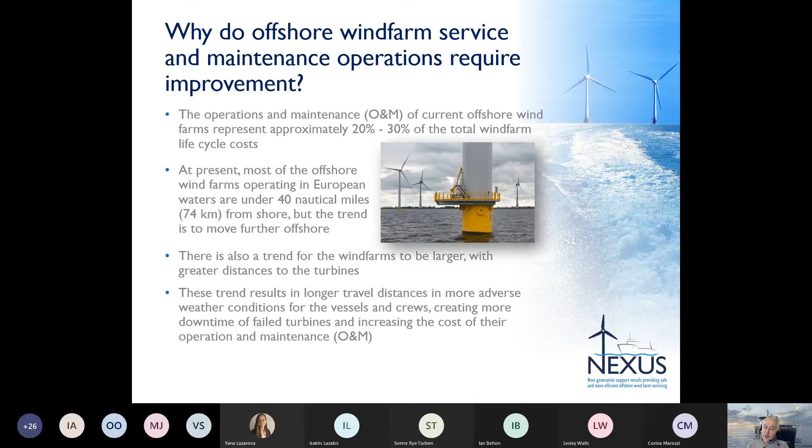There are also major opportunities to improve O&M by being more proactive and looking at data-driven maintenance and operation - planned operations and being less reactive to failures as they occur. A large part of the project has been involved in this.

Looking at what NEXUS has done - NEXUS aims to improve SOV operation efficiency. It's pursuing a new vessel, looking at game-changing technologies, further advances in O&M, and carrying out business analysis and modelling of the complete O&M services.

I'll take a look at the high-level objectives at the beginning of the project. The aim was to reduce logistic costs for offshore wind turbine maintenance by 20% and lower CO2 emissions by 30% using a new design of wind farm service vessel.

To enable robust decision making resulting in reduced costs and effective management of business risks of the service vessel, and to capture robust design requirements for a new design of wind farm and develop a service vessel for operation in the North Sea.

The new vessel concept for servicing offshore wind farms to satisfy and set robust design requirements, and develop specialised safety regulations for wind farm service vessels to improve cost effectiveness and operational flexibility, potentially inhibited by the current generic safety rules.

And then a very important part of the end is to compile a business case and modelling of the whole system for a new wind farm service vessel.

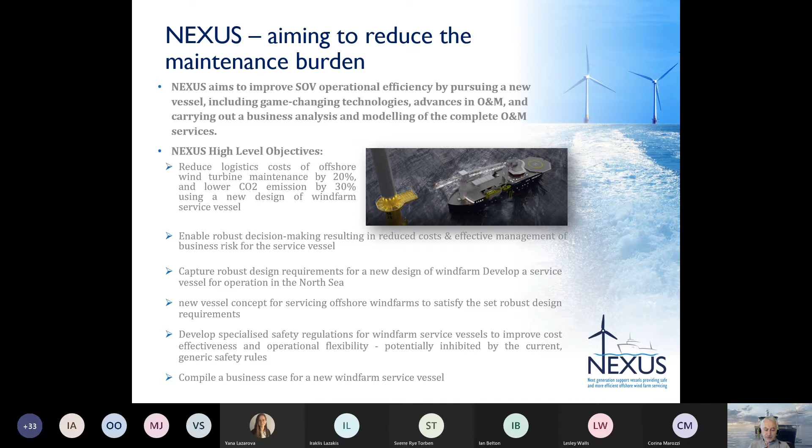So the partnership of NEXUS - we started the project in November 2017, and it's due to finish at the end of this month. The NEXUS consortium has brought together partnership from 4 different countries.

ARTTIC is the coordinator - we're involved in the management, communication and dissemination of the project.

We have Kongsberg Ship Design, and GONDAN, who's a shipbuilder. We've got Global Marine Group providing operational maintenance advice and support, and SINTEF Ocean, who've been providing testing of the vessels and further research. We've got University of Strathclyde, who play a big role in operational requirements, safety management, and the business school modelling for the whole business. And then we've had DNV, the Classification Society, who've been looking at safety regulations and seeing whether they can be modified and improved.

Okay, so a quick run through of the context of the project. What I'm going to do now is pass over to Gerasimos, who's going to take us through, with his team, the requirements of the project.

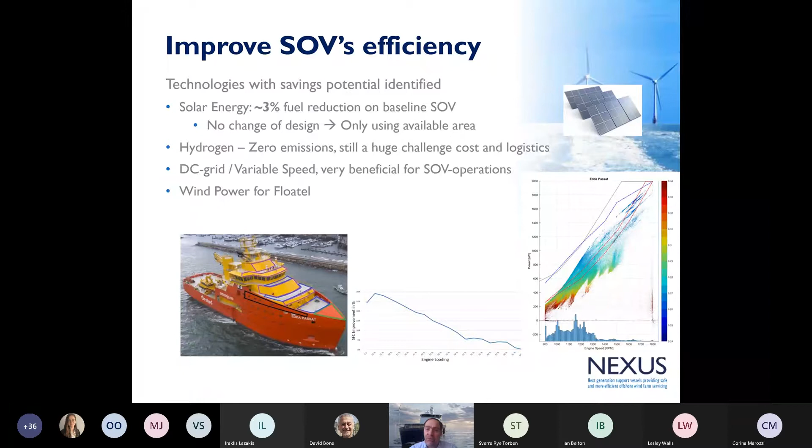Then one of the main activities was to jointly enhance the energy efficiency and operational efficiency. And in this respect, we ended up in a concept that combines predictive power management along with short-term operational planning.

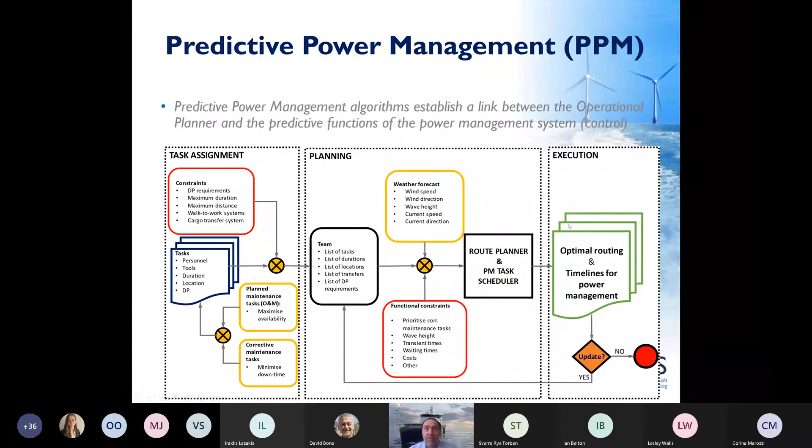The concept starts with task assignment, proceeds with planning of the various tasks, and then also includes the power management and control of load sharing and control of the power plant components. Let me demonstrate the idea a bit better.

In the top layer, we ended up including a mission planner, and a mission planner converts a mission into a list of tasks.

So then, having this list of tasks and going through an optimization mode, we ended up with a timeline. This timeline converts into an operating profile with regards to speed, operational speed, optimal speed versus time, and also the various modes of operation. For example, approach to a wind turbine, leave from a wind turbine, waiting, transit, and so on.

And then this optimal operating profile again feeds information to the predictive power management system, which actually optimizes both operational efficiency and energy efficiency in this way. So one major constraint in that case is the weather conditions, and in this respect we need accurate information for these weather conditions.

In addition, the propulsion modes and the arrival and departure times are considered also as operational constraints.

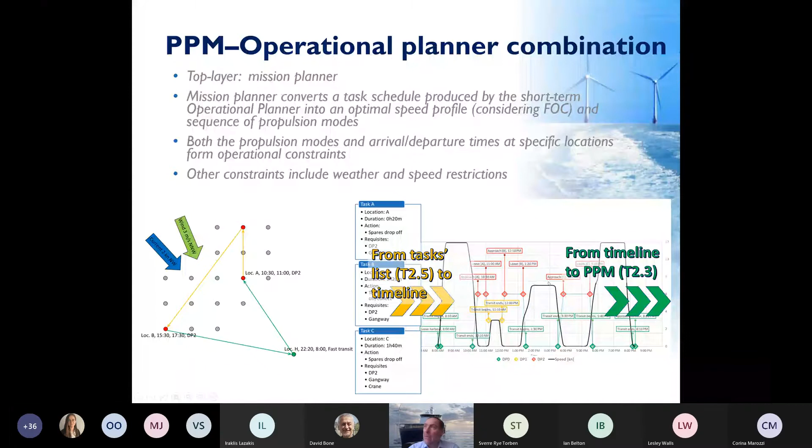Then one part of this tool is the short-term operational planner, and now again Iraklis will lead us through this tool. An optimizer, an optimization tool, was developed in this particular case. So Iraklis, can you please explain the function of the tool?

Yeah, thank you, Gerasimos. So in this respect, this is the development of the short-term operational planner, as part of the NEXUS project.

Going into the particular details of this software, this was developed as a tool in order to have very short, daily, and very quick decision making. So this particular software can be run, depending on the particular input, even on the day, early morning of the day that the actual operations will take place.

The main purpose of this tool is to optimally plan the maintenance operations using a vessel like an OSV, a CTV, or a combination of different vessels, to accommodate the daily needs of the offshore wind farm operations and maintenance.

As input in this tool, you can use the weather conditions, the particular weather conditions within the location of the wind farm, the particular wind farm attributes in terms of the specific location of wind turbines, the wind turbine failure attributes as well, the vessel characteristics, and also, as a final input, the particular fuel that will be used to run the vessels.

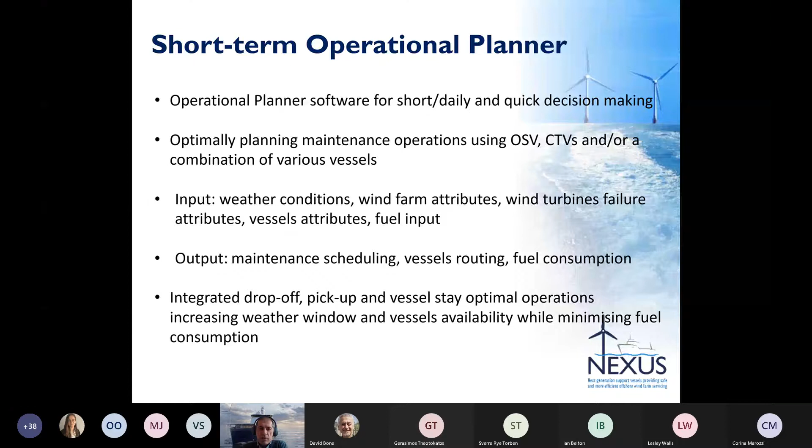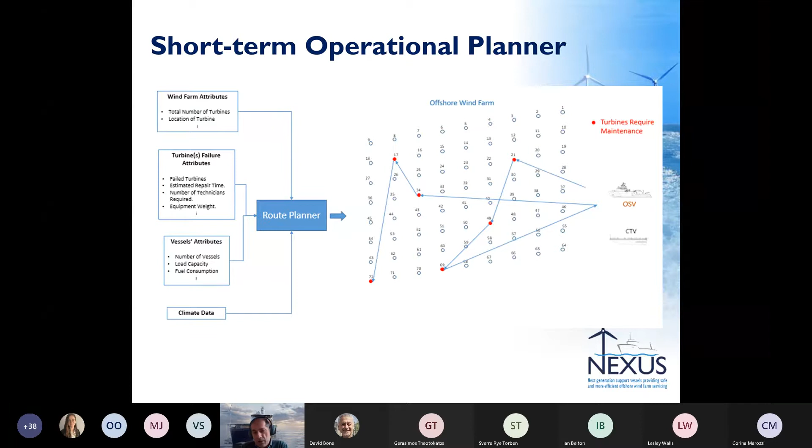So in this case, that's an example of how this particular tool will work, having a number of different inputs on the left-hand side, and how this can then be used to provide the optimal routing within the wind farm.

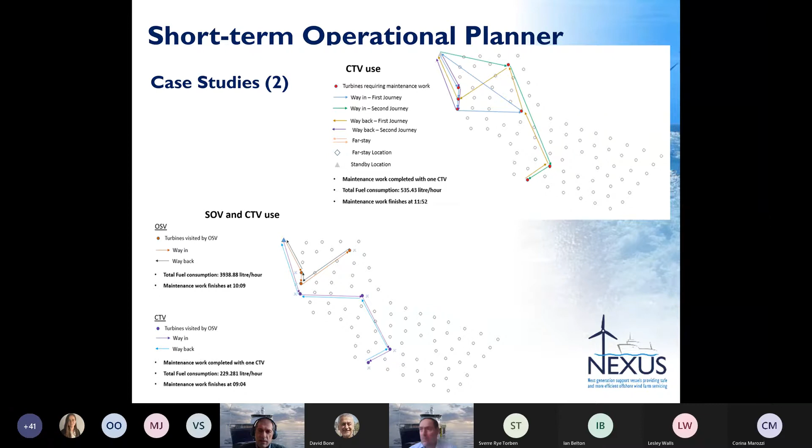So the last part of this presentation covers the safety enhancement of the SOVs and their operations. That was a part of the work performed with the Maritime Safety Research Center and DNV, and also Kongsberg participated and contributed to the work.

In this respect, we started with a safety analysis of the baseline design along with proposed technologies, and we included in the safety analysis the power management system, including power generation, distribution, control, batteries, and predictive power management, the dynamic positioning system, the motion compensated gangway system for technician transfer, the interface between the SOV and the wind turbine, the interface between the SOV and the daughter crafts with different davit systems. We also investigated the cybersecurity

vulnerabilities, and at the end we used the results in order to enhance the safety management system and also to map regulatory and class rules that need to be amended or added in order to cover all these requirements.

So we'll start with the safety methods we use traditionally. The maritime industry uses traditional methods, for example FMECA, FTA, HAZID, HAZOP, however these methods, although they cover critical failures and can cover reliability problems, they cannot cover all unsafe scenarios.

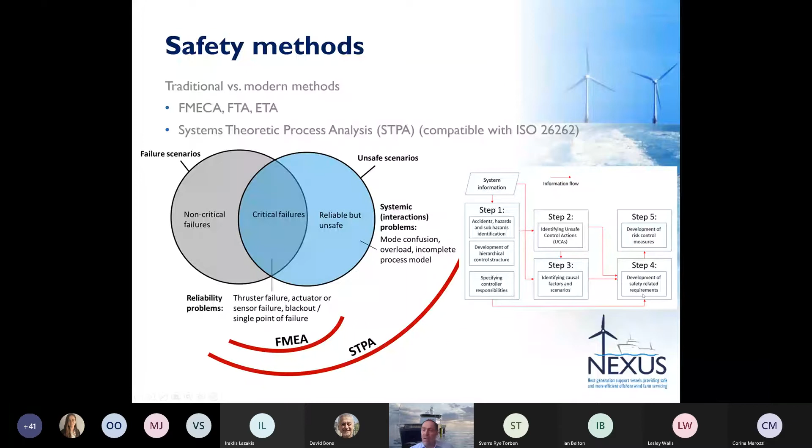So in this respect, in the NEXUS project, we use more modern methods. For example, we use the System Theoretic Process Analysis, STPA, which was developed from MIT and used in a number of systems in aerospace and avionics. In this particular case, we followed the STPA process to identify unsafe control actions which may lead to an accident or a hazardous scenario, the causal factors leading to these unsafe control actions, and then in order to develop safety requirements for all the areas that I mentioned in the previous slide.

Moving on, a causal factor is a factor that basically leads to an unsafe control action, and an unsafe control action can lead to a hazardous state. For example, a causal factor is the gangway operability suddenly reaching the limits, or alarms going off. This leads to an unsafe control action, which is to retract the gangway, and then this may lead to hazardous states, which may occur if the gangway is retracted while technicians are being transferred.

When we map and identify causal factors and unsafe control actions, we can propose prevention measures, both for design and operation, and mitigation measures, which need to be applied after the unsafe control action occurrence. We also consider causal factors from the safety assessment and cybersecurity threats, leading to a holistic mapping of safety requirements during operation and design of this vessel.

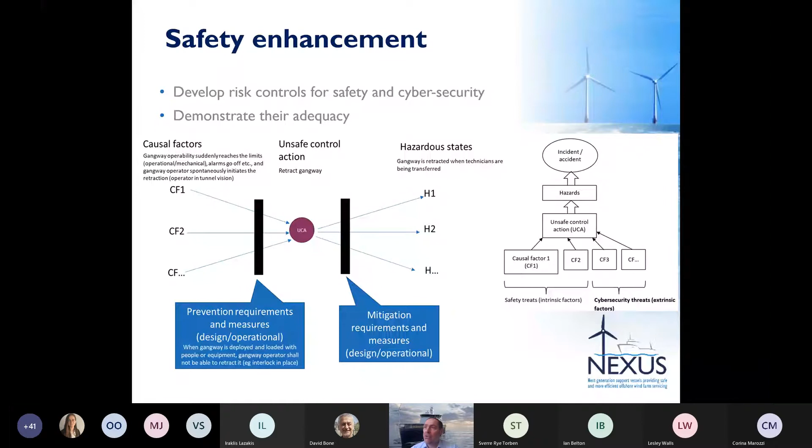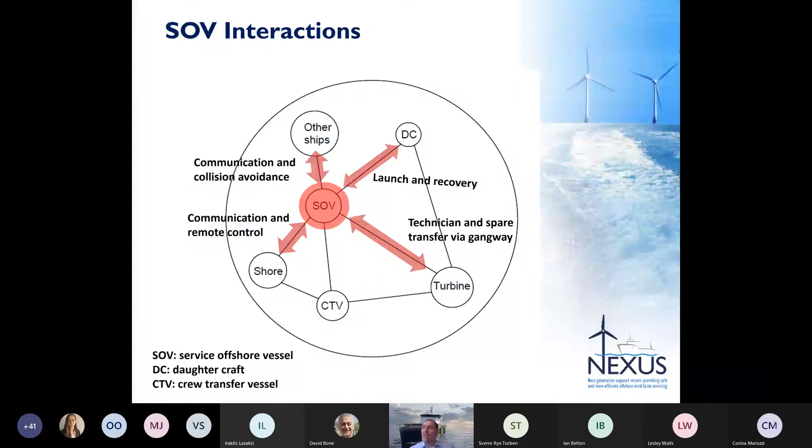We included the interactions of the SOV with all the actors, for example with the shore, the crew transfer vessel, other ships, the daughter craft, and the wind turbine, as well as individual interactions between the SOV and each of these actors. We also considered a number of operating modes, such as rest, transit, maneuvering control of the SOV, interface control during deployment or use of the gangway, and interface control during deployment or launch of the daughter craft or crew transfer vessel.

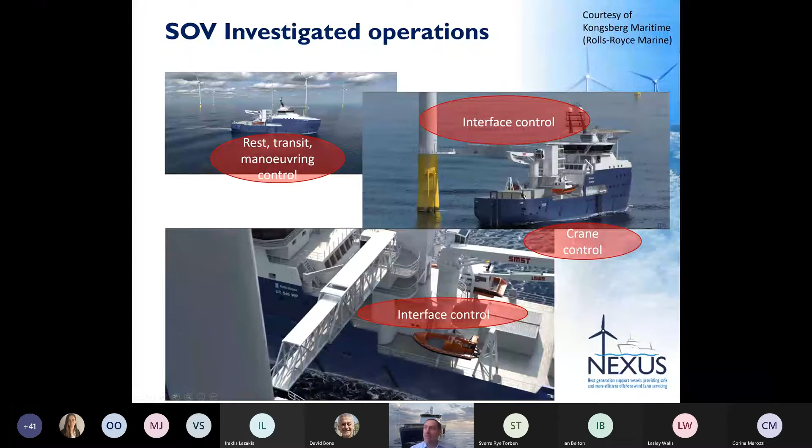This ended up producing a very large envelope, so we needed a more automated way to carry out safety assessments.

In this respect, we developed a semi-automated tool using the STPA method. After the user includes the unsafe control action, there is an automated way of producing the causal factors from specific lists that we developed in this application.

This leads to a number of functional requirements, related either to design or to operation. We then ended up proposing preventive or mitigating measures, and ranking their impact in terms of severity and cost effectiveness in order to prioritize the proposed measures.

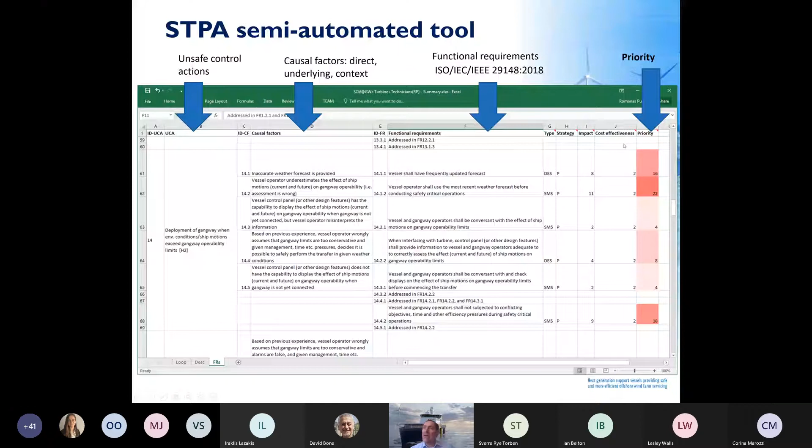This led to a very large number of requirements. For example, for the SOV bridge and dynamic position operation, we identified 145 requirements. For the davit operation, 38 requirements. For the gangway operation and technician transfer, 88 requirements. For the daughter craft operation, 27 requirements, and for technician transfer to daughter craft, 16 requirements. That was the final state of this analysis to map the requirements.

Work was also carried out by DNV. They considered the requirements and the design rules, and mapped which requirements are covered by existing rules and class regulations, for example the class rules of DNV and the regulations from SOLAS, and which requirements are not covered. In that case, recommendations for amendments to the rules were proposed.

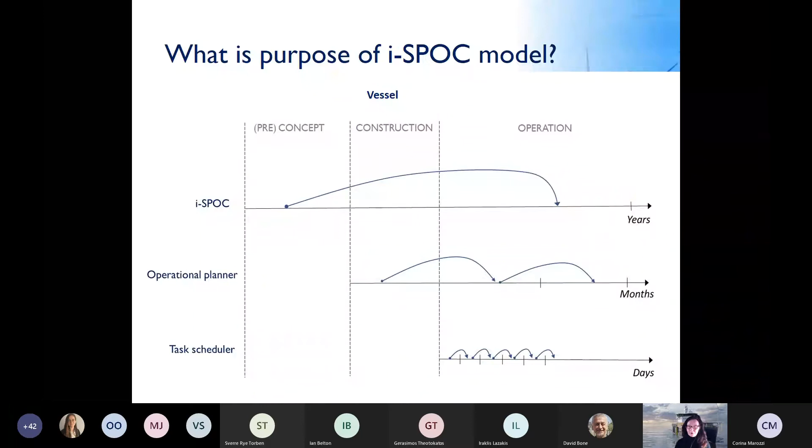But as you can imagine, the data demands we need to feed these models is also quite different, because we don't have the granular data that you might have when you're actually in an operational context.

So from the i-SPOC point of view, what we're really doing is focusing on supporting decisions about design choices of logistic concepts by forecasting what their future operational capability will be. So from the vessel designer's perspective, we're thinking about how we make choices internally to the company that will cause positive impact on the external business market for offshore wind in future. However, from a business perspective, we don't know what the future will be.

And as we know, there are always shocks to the business environment. So one of the things we wanted to build into our modelling framework was an understanding, or a visioning, about what these future business environments might be. If we could do that, it provides us with a mechanism for thinking about what might happen externally in future, to help us think about, at the very least, the robustness of the choices we make now about the vessel solution.

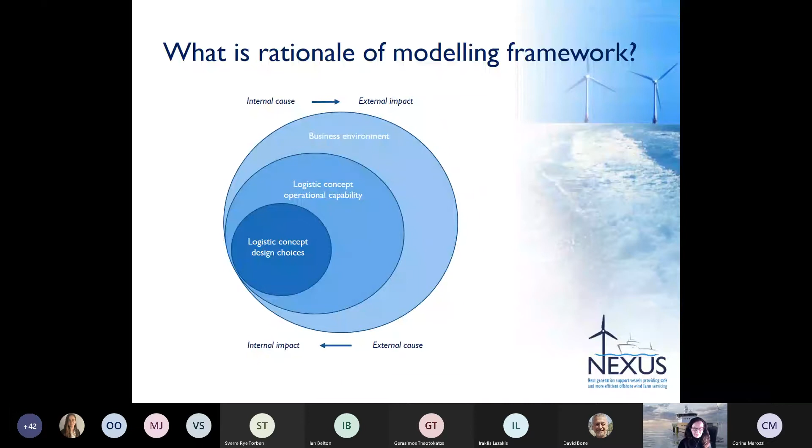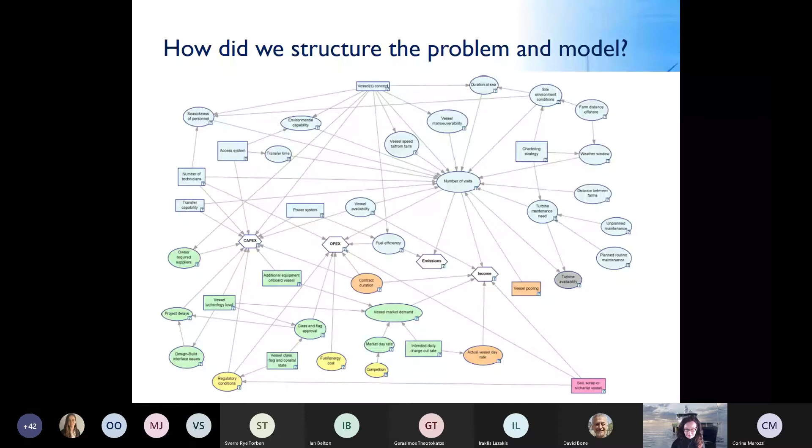So when we build the model, we actually use a mathematical model. We've chosen to build this i-SPOC model as an analytical model, drawing on established probability theory, in particular queuing theory.

Now, why did we choose to build it as an analytical model rather than as a big simulation tool? There were a number of reasons. One is that it allows us to express the relationship between all these uncertainties and choices and our KPIs very explicitly, and to understand the nonlinear relationships that might happen in the system between all these variables. Also, by building it as an analytical model grounded in established probability theory, it allows us to have a coherent means of understanding the integrity of the way we represent uncertainty in the model.

The other reason for us is it also allowed us to have a good first order approximation to this NEXUS world, which allowed us to span some of the key engineering decisions with some of the business consequences, without getting too detailed in either the business or the engineering, but to try and balance the two.

Now, I'm not going to show you the maths of it. In a little while, Ewan will share some of the outputs, but let me just try and summarize some of the key features of it.

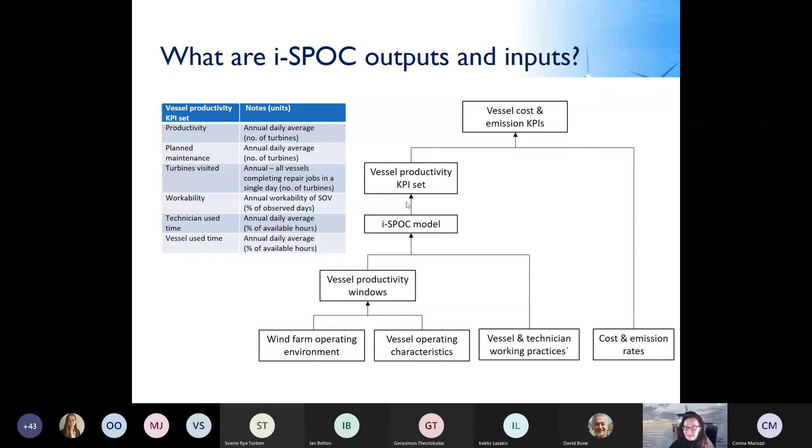So at this point, what I will do when talking about the vessels is pass over to Vidar, and he will describe these vessels and their operating characteristics. Ewan will come back later to describe some of the analysis.

Perfect, then I will open my screen. I believe you see it. I will run through how we have done the ideation and down-selection of logistics concepts to be run through the i-SPOC modeling.

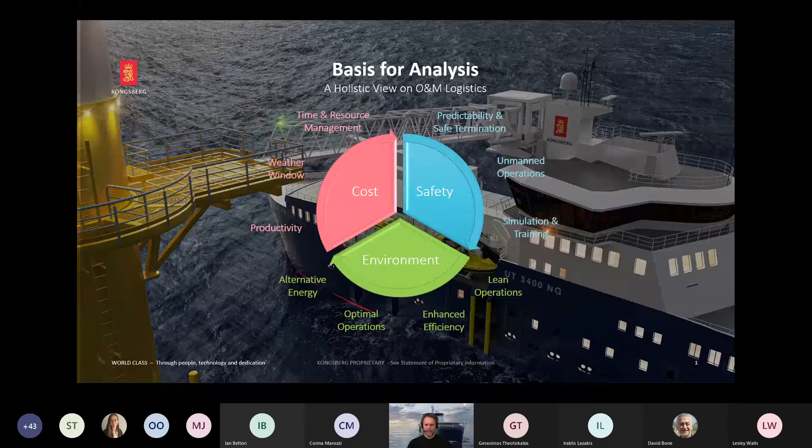What is a bit unique to the holistic view is that we do not only model the performance of the vessel, we also put it into the context of the overall operation and look at associated costs.

These associated costs are also factored into the modeling that we are doing, which means that the optimal overall concept might not necessarily be the cheapest vessel, but the one that we can justify performs best, including these associated costs.

Starting at establishing logistics concepts, we're breaking down the duty into its elements. O&M can in principle be done by offshore operations, meaning technicians being housed offshore, or shore-based operations shuttling to and from shore. The latter is not a core part of the NEXUS scope, so our focus has been on the offshore solutions.

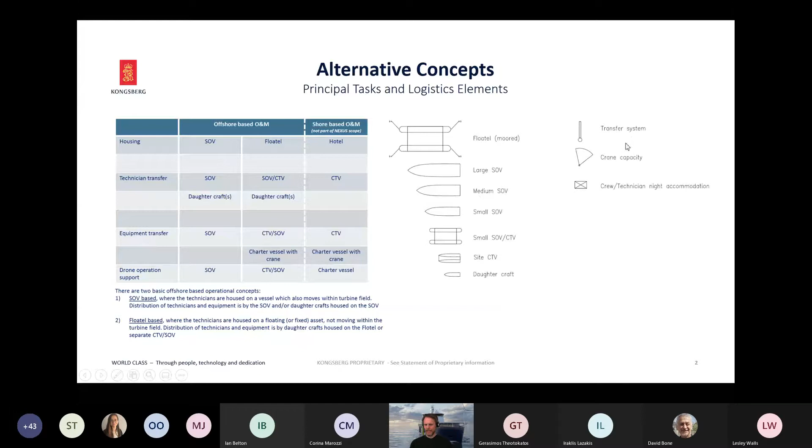In the future, we also believe drone operation support will increasingly be a relevant duty of these logistics setups. Looking at these fundamental tasks, we populated our toolbox of flotel, various sizes of SOVs, CTVs, and daughtercraft, and also transfer systems, crane capacity, and fundamental accommodation function.

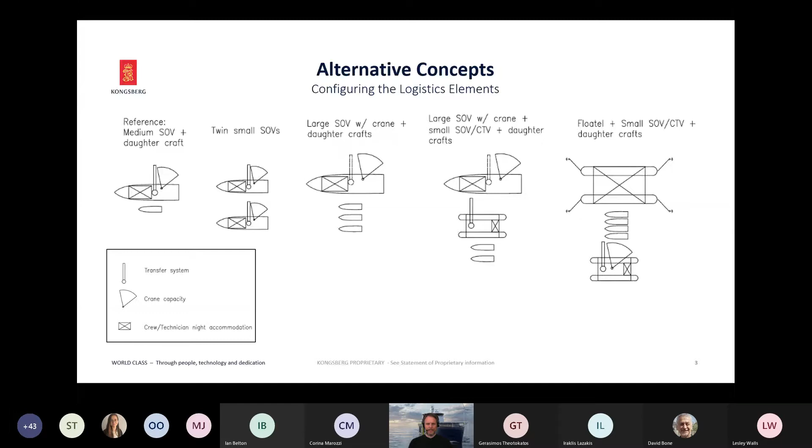We then configure different logistics setups comprising one or more assets, each configured to be capable of delivering what we believe is the needed capacity in the field. In terms of SOV concepts, we also assessed various hull forms, more or less exotic, having different buoyancy distribution, different water plane area and center of flotation, thereby having different capabilities in terms of resistance and motions.

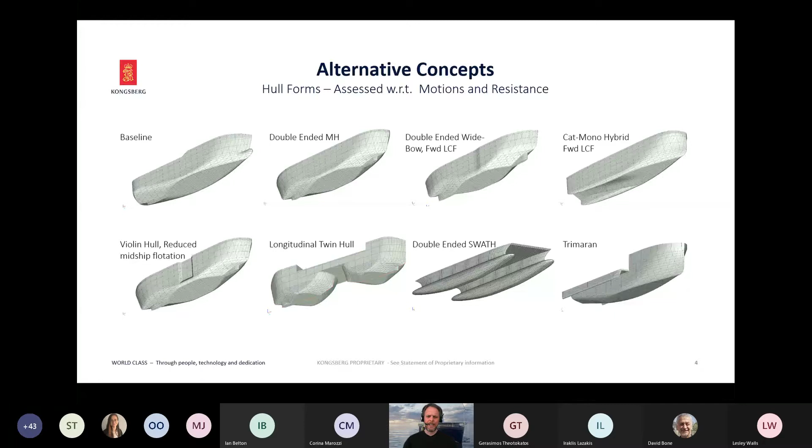This was also considered in the context of us wanting to assess not only the typical midship mounted gangway, but also the prospect of a bow mounted gangway, as we will touch upon later on. We then, for each of the concepts, did a parametric design to scale them, ensuring that each concept has the necessary areas and volumes to deliver the capabilities required.

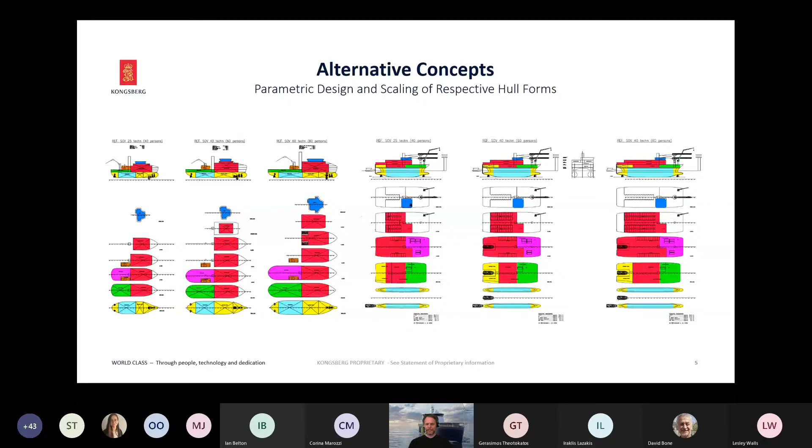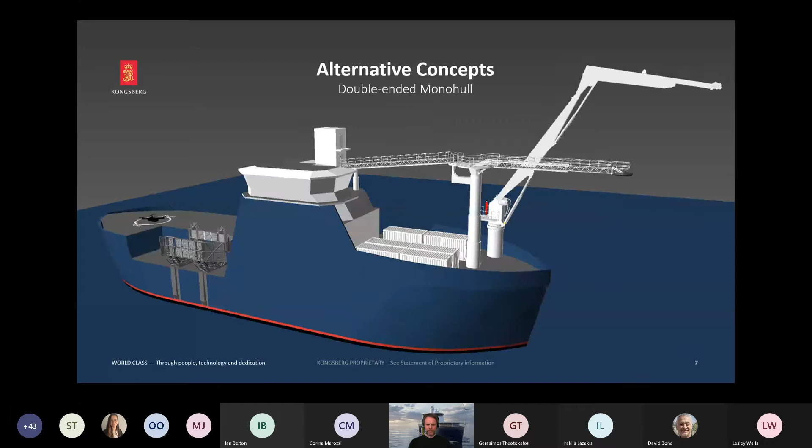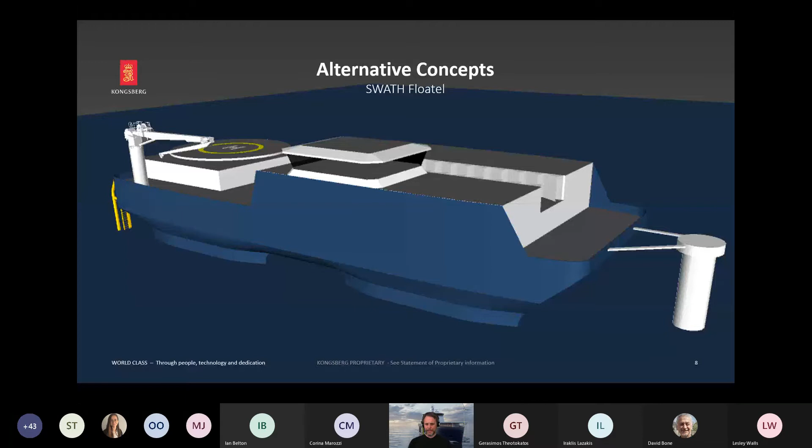And then we had scaled concepts that we could put through analysis. For some of the concepts, we also looked more into practical implications. Here, a case with the bow-mounted gangway with a forward superstructure, the same concept with a central superstructure, obviously affecting how we can arrange the vessel internally. And also here, a SWATH floatel concept fixed to a fixed monopile structure offshore.

Then putting this through analysis with respect to resistance, motions, productivity and energy demands, we were looking at knowledge from past operations of similar vessels. And we see that generally, of course, O&M operations consist typically of cycles of roughly half an hour's duration, where you transfer between turbines, connect to a turbine, transfer technicians and equipment, and then move on to the next. This is pretty much similar to a ferry operation, more than a typical cargo vessel operation.

What we found in our analysis, broadly speaking, is that the more exotic hull forms generally tended to have more resistance, especially at higher speeds, whereas the differences at more moderate speeds, the type of speeds that you operate with in a wind farm, were minor. In terms of motions, the more exotic hull forms tended to sometimes perform better in certain ocean environments or sea states, but poorer in others. In conclusion, we found that the more exotic hull forms did not provide, let's say, robust benefits overall.

And we gravitated towards a hull form that is for sure novel, but still fundamentally a monohull of a fairly conventional sizing. It's a double-ended monohull. It will typically be equipped with 2 azimuth thrusters forward, 2 azimuth thrusters aft, and the advantages of that configuration is increased maneuverability, allowing for better acceleration, turning and braking power, and also better station keeping efficiency by the fact that you can use the main propulsors in an optimum manner in DP operations. Also, the symmetry and more uniform component choice should allow for simplified engineering.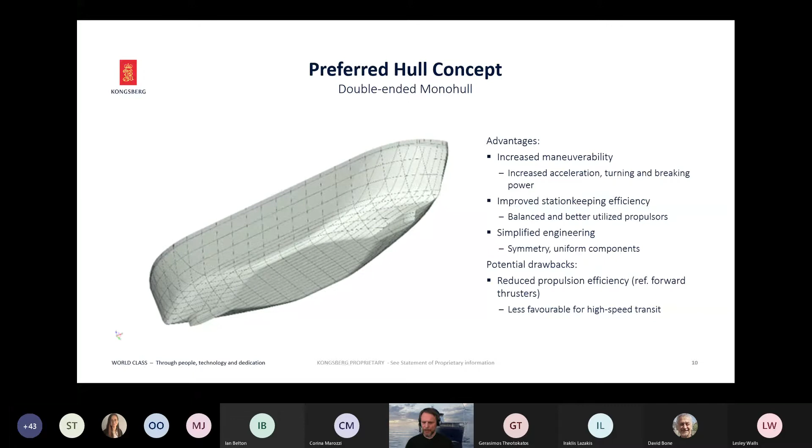In terms of drawbacks, having forward thrusters would be some drawback at higher speeds, but considering an SOV operation, most of the operation is at moderate speeds, where the benefits in terms of maneuverability much outweigh the disadvantages of forward propulsors. So this became our preferred concept hull-wise.

Then looking at means of transfer, we see that typical SOVs do have an extensive use of daughtercraft, here indicated with the red lines over a period of close to half a year. But then the gangways are being used for the blue bars. So daughtercraft provides an important flexibility. At the same time, it introduces a vulnerability, as we see towards the right-hand side here, where there is a period of a few weeks where you cannot operate daughtercraft due to inclement weather conditions.

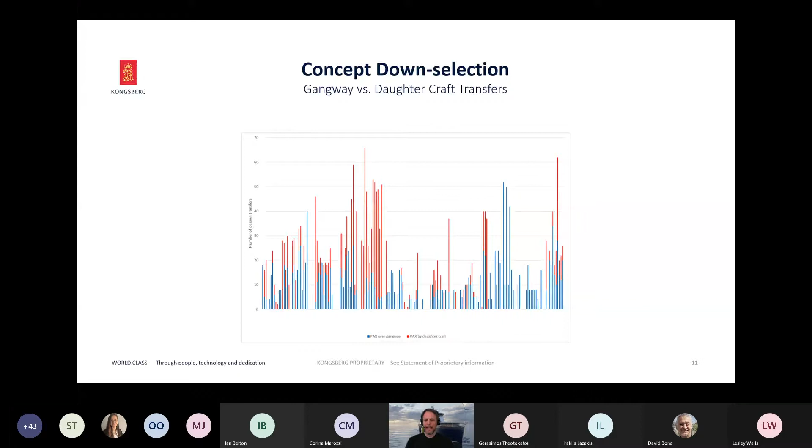So in conclusion, we found that we would probably be bound to have a concept including a gangway apart from daughtercraft. And that led us to suggesting concepts for the iSPOC analysis with direct transfer SOVs with gangways based on the double-ended monohull with the side gangway, the conventional setup, and the more exotic or new novel setup of a bow gangway.

Then for reference, we maintained a SWATH SOV design as well, also in different sizes in terms of technician count. And then we wanted also to compare that with non-direct transfer SOVs based on monohull, SWATH, and floatel designs. So these are the designs moving into the iSPOC analysis, which I believe Ewan will present more of the results of. I pass the floor to Ewan.

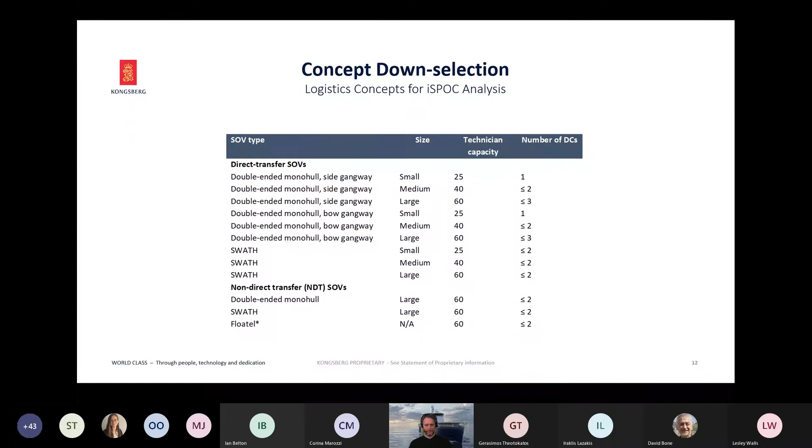Okay, thanks, Vidar. I'll just share my screen. Okay, hopefully you can see my screen okay.

So I'll just show a small selection of analysis using the iSPOC model that Lesley set out earlier to investigate the performance of the logistical concepts that Vidar has been describing. More generally, the analysis was run with data drawn on existing wind farms. So we used Dogger Bank and Race Bank with estimates of demand for different types of maintenance jobs and the durations of these, as well as the vessel operating characteristics, in order to generate the productivity windows that Lesley was discussing earlier for different times of the year.

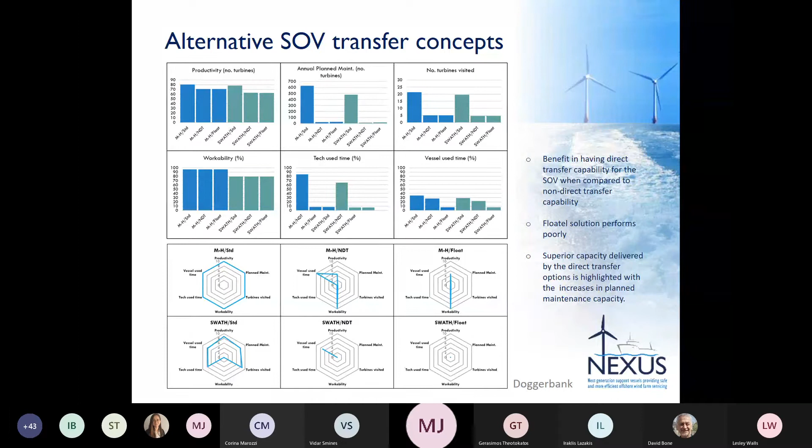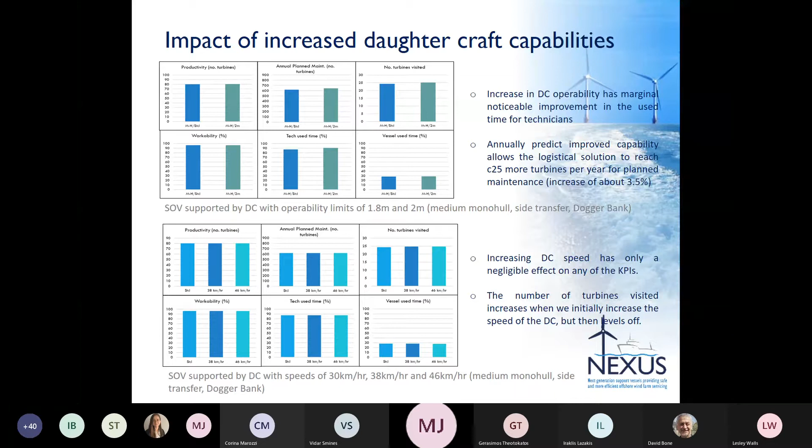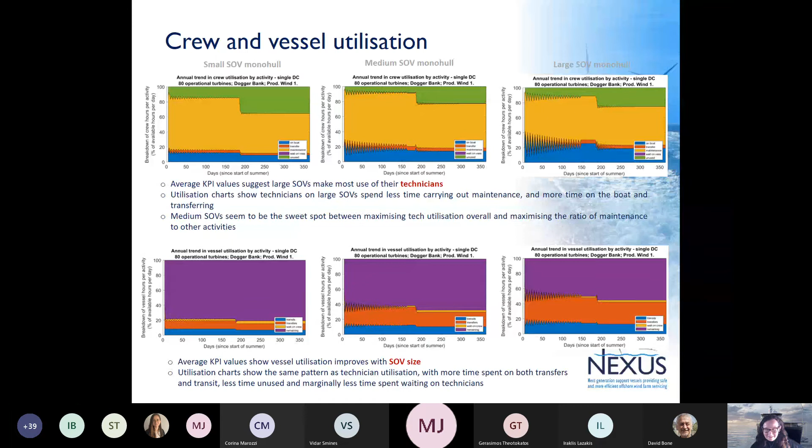So I was just going to summarise, because Ewan's just given you a flavour of some of the analysis we can run, particularly looking at the productivity KPIs in relation to some of the vessel concepts that Vidar has described. And if we go to the next slide, please, Ewan.

I think one of the things I wanted to end on was a little bit of reflection about how we validated the model, because we are trying to forecast well into the future for a vessel that doesn't exist, for farms — although in some test cases we've used farms that do exist — but for a situation where we've not actually applied the vessel. So I wanted to share how we'd approach validation, because we can't necessarily do it in the conventional empirical way.

Part of it goes back to our academic work and the fact that we're working with theoretical models, and we've made choices about algorithms to implement some of that theory into a software tool. So there's been a lot of backroom work in terms of mathematical proof and experimental analysis with those algorithms. But more importantly practically, in this ISPOC model there are about 30 assumptions that we have made and negotiated, sometimes quite vigorously amongst the team.

These assumptions fall into basically three categories. There's a small set that are hardwired into the theoretical underpinnings of the model — once they're signed off, we can't change these. Then there's a set of modeling choices that are adaptable, but require a modeler like Ewan, or someone else from the Strathclyde team, to adjust the model to ensure we maintain the integrity of the underpinning probability framework.

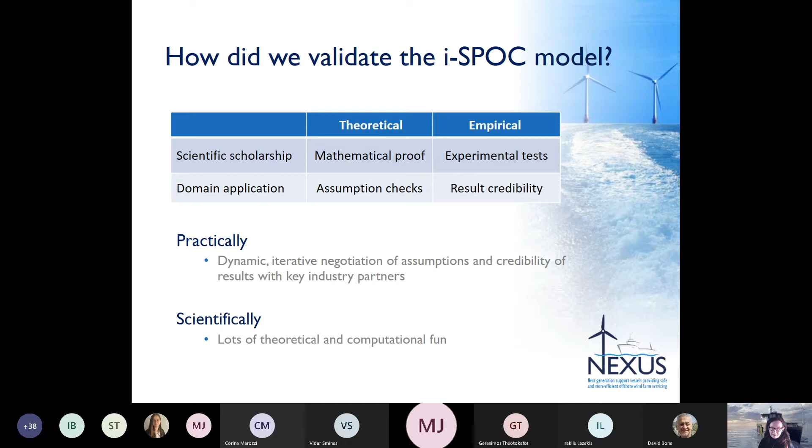So I'm going to finish there for now in terms of this modelling framework. As we've already indicated, later this morning some of our other colleagues from the business school will talk a bit more about how we've used some of this within a wider business analysis, particularly looking towards the future of offshore wind. But at this stage, I'm going to ask Matthew, who's been keeping an eye on questions — I think we still have a few moments for any questions about this section or anything that Iraklis, Marcus and Dave talked about earlier this morning.

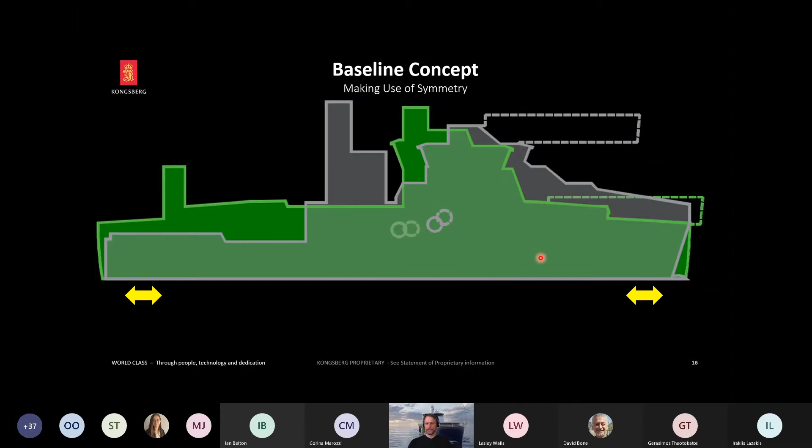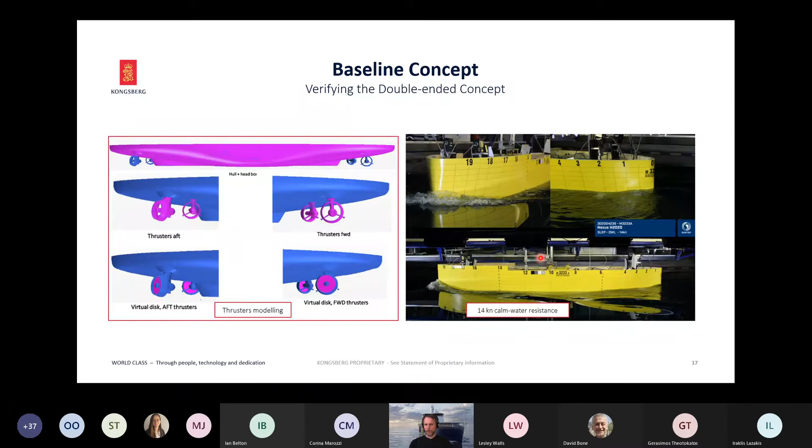The double-ended concept was further explored and verified through numerical simulations and also tank testing, which led to notable improvements in the design and performance.

In terms of the overall layout, we focus on symmetry and try to facilitate scalability and minimize build cost. That means we want to keep some parts of the vessel stable, whereas other parts could be scalable. The starting point is a midship logistics section. It comprises the main elevator case, has a boat landing to starboard, a pallet handling system to port, and the charterer and ship offices in the superstructure. This section basically remains unchanged irrespective of the scale of the vessel.

Then towards each end, we have machinery sections in the bow and the stern. These are also largely remaining the same irrespective of vessel scale. Then importantly, in between - in what is still the parallel midship section to a large extent - we create scalable sections where we can choose the extent of personnel, alter the number of daughter crafts, and also the packing area capabilities.

In the center of the vessel, we also have an independently scalable service section. We see that there are longitudinal arrangements that allow us to alter the central section independently from the side sections. This creates flexibility in how we execute and prioritize the use of volumes, and importantly, we can lengthen or shorten the vessel by prioritizing different capabilities depending on the project.

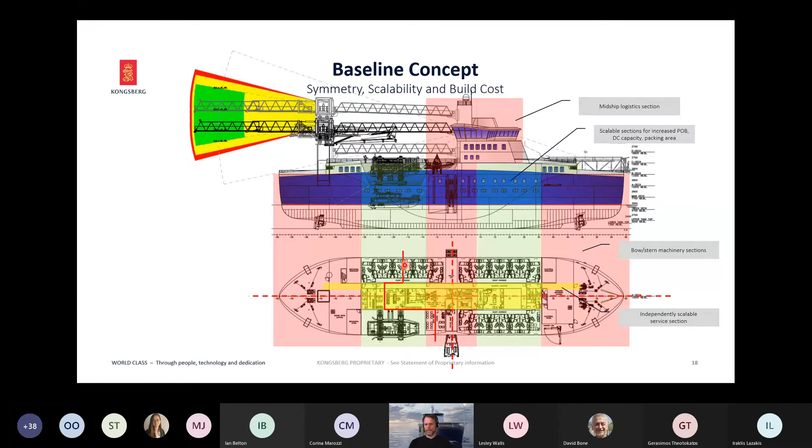A novel feature is that we have restacked the vessel. Notably, the packing area is moved down to the tween deck, which is often a bit underutilized area on these vessels. Typically, the packing areas are on the main deck. This is then extended with the logistics functions up.

We have made available the core and scalable parts of the vessel for the client areas, meaning all accommodation is above the waterline, close to the midship, in the most comfortable areas of the vessel. So this is a very charterer-oriented vessel, focused on comfort, apart from scalability. Then the more peripheral areas of the vessel are used for vessel systems.

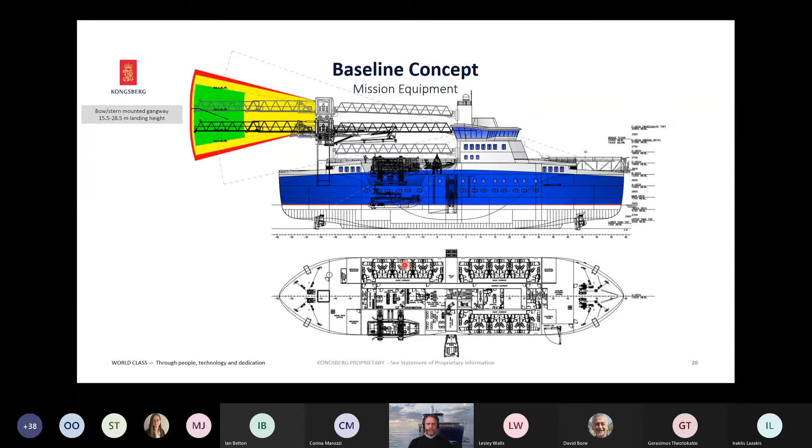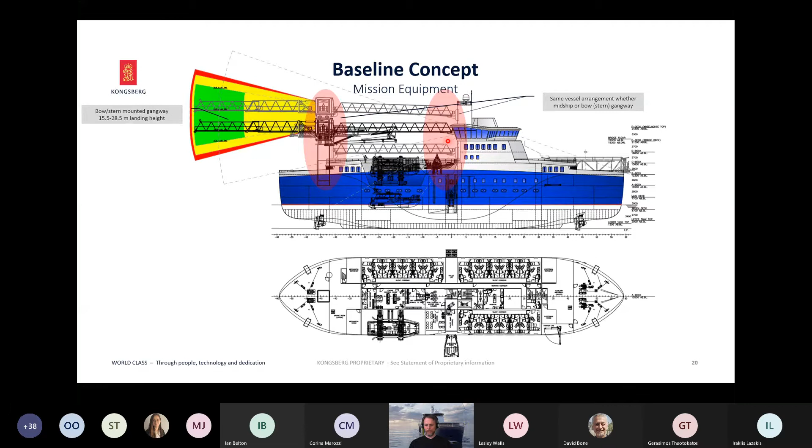In terms of mission equipment, we have a stern-mounted gangway, or you could call it a bow-mounted gangway since it's double-ended, as a more novel approach. But it's notable that we can also apply a conventional midship-mounted gangway without any alterations to the design as such. So this is an important flexibility.

We have fitted the vessel with a boat transfer system that we will comment upon later on. We have notably stepless daughtercraft and CTV landing to the starboard, meaning you have movable ramps both at main deck and A deck level, where the lower one typically services daughtercraft and the higher one typically services CTVs, all stepless.

On the port side, we have a pallet lift system. We have opted for the cargo logistics to be based on pallets, and you can easily land cargo with trucks, which is transferred into the packing area on tween deck.

By making the superstructure smaller and moving it closer to midship, we have also allowed for lowering the optional helideck, thus lowering the center of gravity and largely reducing the air draft of the vessel.

In terms of the mission equipment, the gangway on the stern is an alternative we are considering based on the fact that wind farms tend to have ever higher landing heights. That means the pitch of the vessel will start to move the gangway platform more and more, which with a conventional gangway will have to be absorbed by slewing the gangway, which could result in misalignments and torsion to the wind turbine. This could be resolved by moving or rearranging to a stern-mounted gangway.

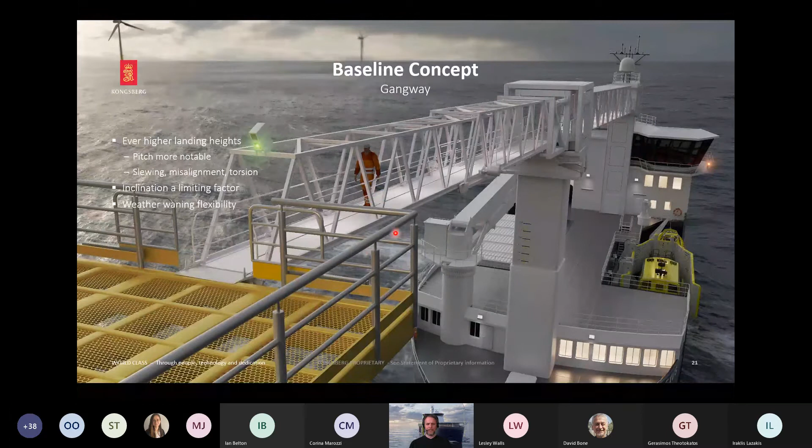Given the improved maneuvering capabilities of the double-ended design, we are currently in the process of exploring and establishing improved ways of maneuvering that will have an effect on how DP systems are configured, and which would also depend on creating new ways of acceptance to how you can operate in a wind farm, new types of safety barriers allowing for more effective and straight-on type operation. But for sure, the double-ended design provides very interesting opportunities in our view.

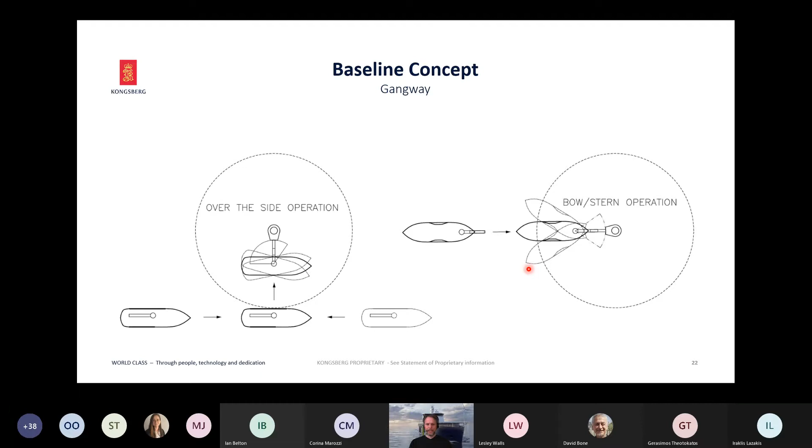But as mentioned, we do have available the option of a midship-mounted gangway, which has also benefits in terms of workability, possibly.

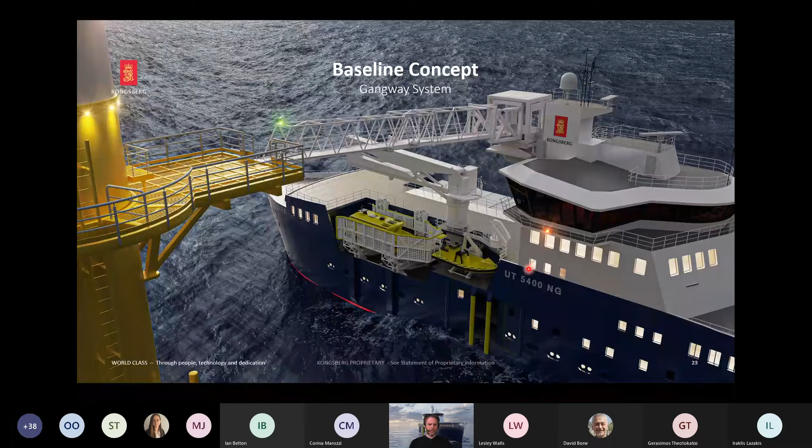The boat transfer system is an interesting solution to improve the safety and robustness of daughtercraft operations, which especially for a larger SOV with more technicians and more dependence on daughtercraft is important. The boat transfer system is basically a semi-submersible cradle where you can lift the daughtercraft in and out of the water. It allows for controlled launch and recovery, prevents the need to operate painter lines and do hookup of davits, and allows for inboard boarding and disembarking, especially in inclement weather, rather than doing it via a boat landing.

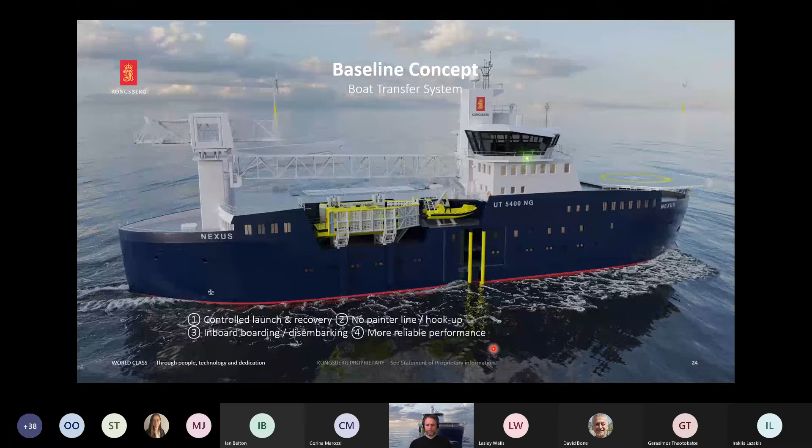And not least, it provides for more reliable performance. And that reliability is what in practice determines the weather window that you can operate in.

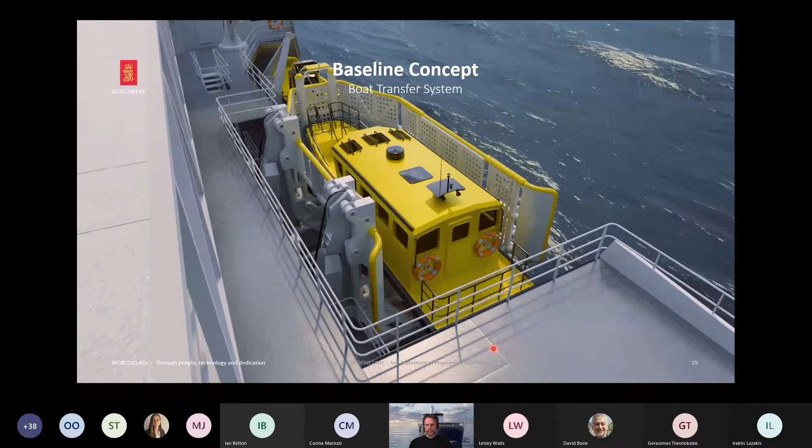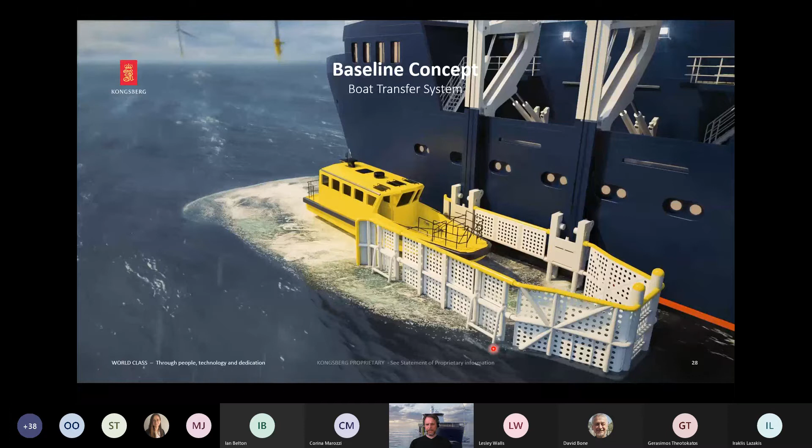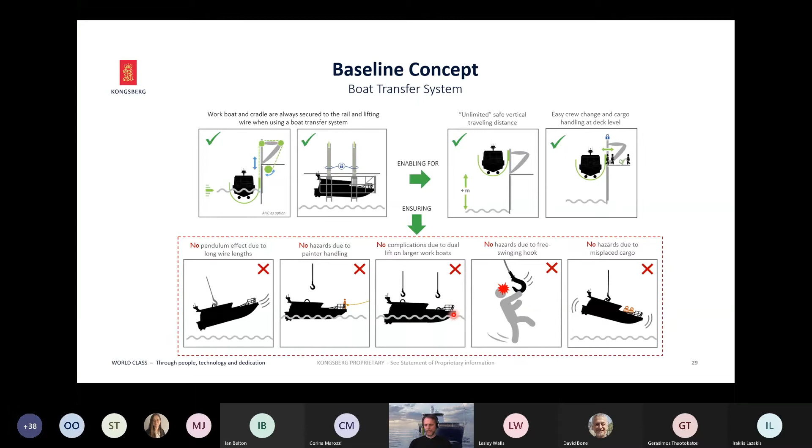Here shown in the inboard position where you can do embarking and disembarking of the vessel. It is then moved over the side and lowered along rails into the water, from which the daughtercraft can propel itself in and out, meaning that this operation can take place with technicians and crew of the daughtercraft being safely housed within the vessel. So the main benefits are that you have no pendulum effect due to long wire lengths, and you avoid the hazards of painter line handling and hookup. Especially hookup is dangerous in the case of dual hook larger daughtercraft, where you need to hook up also typically on the bow. So overall, this is a much safer means of operation.

In terms of power systems, we have opted for a battery-biased system, with the idea that all infield operations can be done electrically. The baseline case is based on a daytime operation, 16 hours of operation, leaving 6 hours of charging at night and 2 hours idle as a buffer. We have also installed diesel gensets, which allows for flexibility to operate in areas where you do not have access to offshore charging, and as a range extender, typically used in transit to and from the field.

The propulsion setup in the vessel will typically consume 500 to 1500 kilowatts for propulsion power during infield operation, with occasional peaks up to 2500 kilowatts. The installed power is higher for sure, also due to redundancy, and in inclement weather power peaks also above 2500 kilowatts may occur. In transits, depending on the speed, you can use anything between 1000 and 3000 kilowatts, roughly speaking. Importantly though, the average infield propulsion power used is less than 1000 kilowatts, and this is what makes batteries viable, because the actual energy flows are not substantial on average.

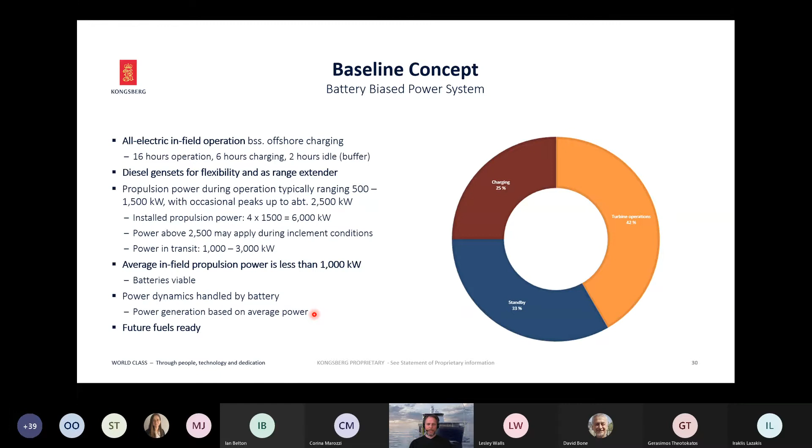At the same time, batteries are capable of handling substantial power dynamics, as we see from the figures above. That means that power generation can be configured according to the average power demand rather than the peaks, and reducing the power generation demand will also greatly facilitate the use of future fuels. Although we have opted for electrical operation with offshore charging as maybe the more viable avenue, other fuels can be considered. But typically when you use future fuels, you would want to minimize the power generators, and for instance, if you use fuel cells, they are not particularly capable of handling power dynamics. So the combination with a battery-biased system is ideal.

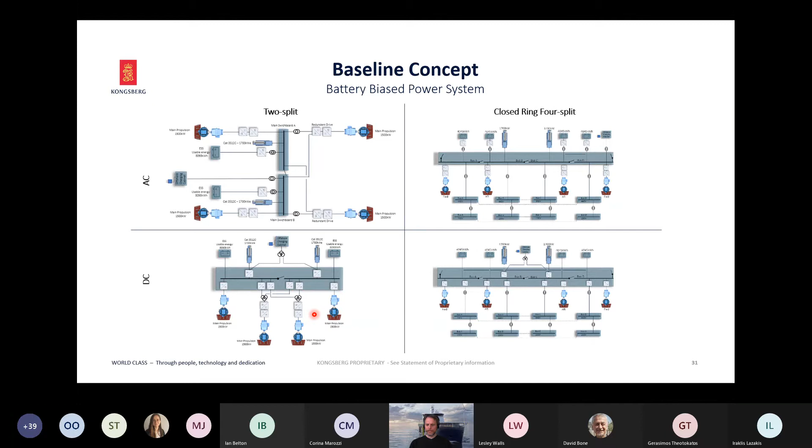We have considered both DC and AC systems, done fairly comprehensive analysis based on 2-split and 4-split configurations. For the given operating profile we had here, in the case that we assume diesel generators as the power generator, meaning we do not consider offshore charging, the DC closed ring proved to be more effective, but this is very case dependent. At the same time, the DC closed ring setup is very suitable for offshore charging, so this vessel can easily incorporate offshore charging into the energy mix.

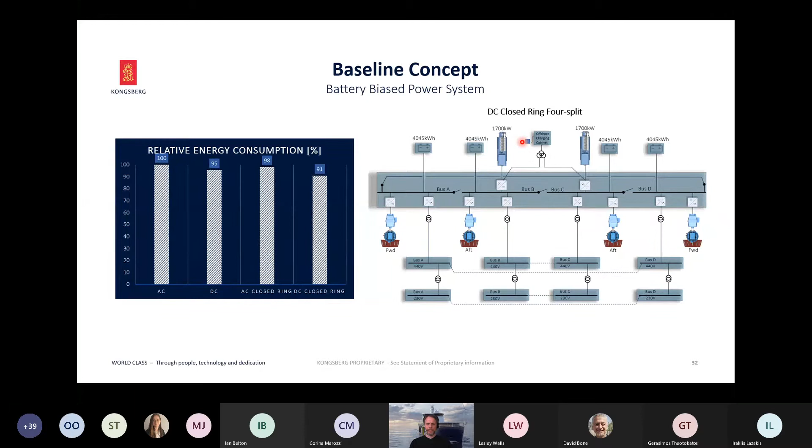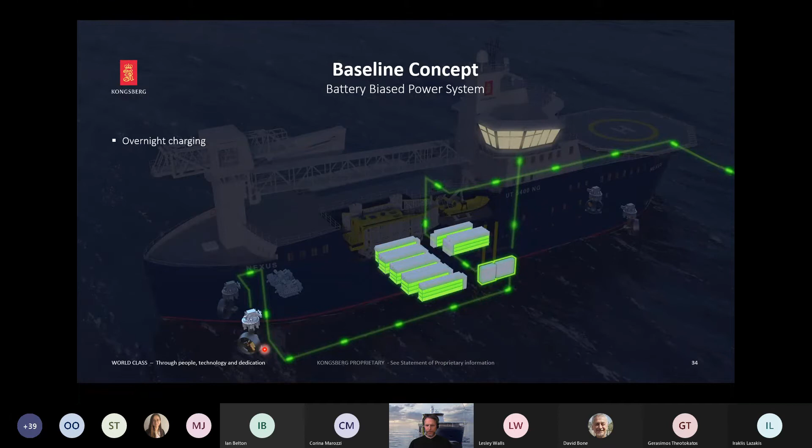As mentioned, the idea is all-electrical infield operation with overnight charging. If you have a 24-hour operation, you will typically split the charging into two briefer periods, which would depend on higher power charging to sustain the required energy transfer. We are working on relevant solutions for offshore charging. The buoy indicated here is just an illustration, so don't construe that as our proposal, but the principle is indicated. Overnight, typically charging while being moored to a buoy, maybe having one thruster in operation for heading control and ensuring gap versus the infrastructure you charge from. And in the event that batteries are depleted, you can start up the diesel generators to support during operation.

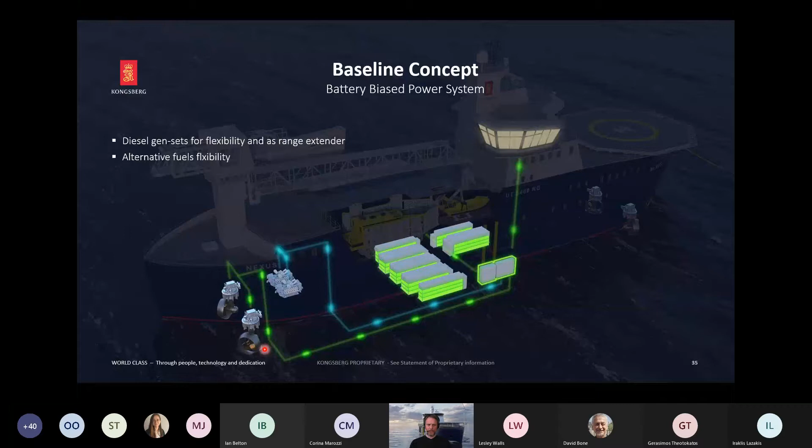Then I will pass the floor to Odd on some of the risk implications of offshore charging.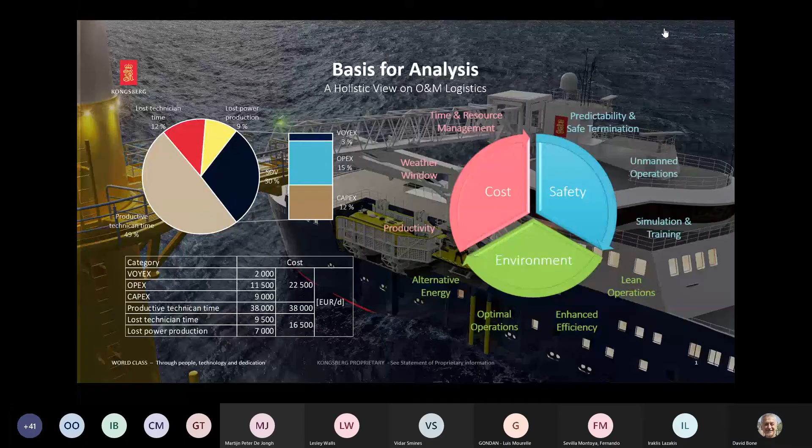So in this final section, we're going to look to bring together a lot of the modelling that's gone on to date, and look to the future as to how these vessels might be used, and really try to revisit some of the connections that we made, what Lesley brought up earlier on, between the operational performance of these concepts and the business value that they can deliver.

It's going to be myself. My name is Matthew Reevy from the University of Strathclyde Business School. I'm joined by Ian Belton. But as with all the work done within this section, it's really been a team effort from myself, Ian, Ewan Barlow and Lesley Walls that you heard from earlier, and John Quigley at Strathclyde University. So Ian will talk a little bit about the foresighting we did to think through some scenarios, and then I'll talk about some of the modelling we did, focused very much on the vessel owner to help them develop a business case, and then the scenario-informed analysis we used around the logistical concepts that Vidar and Lesley and Ewan spoke about earlier on.

It's probably worthwhile reflecting a little upon the rationale of the approach we're taking here. Rather than considering the business case in quite a narrow sense, as just incoming and outgoing, we're taking a much broader view of a business case as a much more general, holistic strategy as to how we develop and finance vessels that are financially viable over its lifetime. And this part about over its lifetime, I think, is quite an important part, because as Lesley mentioned, we're dealing with vessels that are going to be operating on wind farms that have not been built, and in some cases may not have been designed.

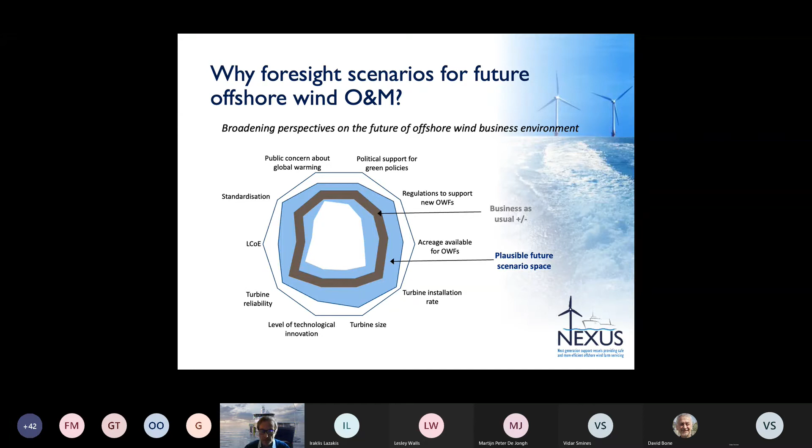While this kind of scenario approach provides less depth than conventional sensitivity analysis for individual variables, it's a really useful way of investigating this kind of complex environment where there's a large degree of dependency between variables. Could I have the next slide, Matthew? Thank you. So how did we go about making these scenarios?

The method we used is scenario planning, and specifically what's called the intuitive logics method. It involves a 2-day workshop. In this case, we had 19 participants from different stakeholders in offshore wind, and I should mention 3 of them were actually from wind farm operators, so they were represented in this process.

Then after that, you identify which clusters are believed to be highest impact on the future of offshore wind and also most uncertain. In this case we had 2: one about forces that would affect the strength of support for expansion of offshore wind and therefore speed of installation of new farms, and the other was extent of focus on technological innovation versus standardization of existing technology.

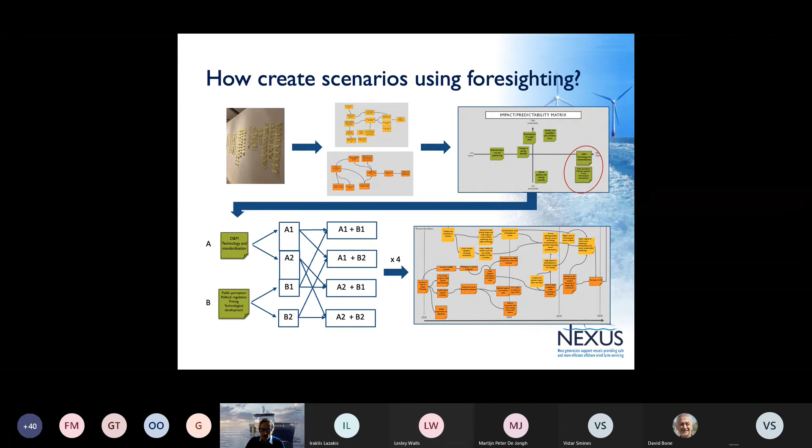And then you cross the outcomes—that's what this diagram shows—you cross the outcomes and you end up with 4 frameworks for scenarios. Finally, once you've got these 4 scenarios, you develop each one, map out the pathways to that scenario's endpoint in 20 or 30 years' time, and agree an overarching narrative. Could I have the next slide, Matthew?

We had two relatively optimistic scenarios: conservative success and bigger is better. Conservative success is about focus on scale, number and size of wind farms, steady growth in turbine size, progress on standardization, and a shift towards planned maintenance away from unplanned. Bigger is better is about innovation, driving turbine size up, perhaps as far as 20 megawatts and beyond, with less emphasis on standardization and optimization, and perhaps more maintenance required because of new technologies which might be more uncertain and less reliable in the short to medium term.

So those are the two optimistic ones, where the flow of investment and support for offshore wind continues. Then we have two more pessimistic scenarios where things perhaps don't go as smoothly as the market now anticipates.

In one, the focus is purely on cost - offshore wind competing on the basis of cost, so bringing down O&M costs, focusing on tried and tested technology and standardization, and reducing maintenance overall.

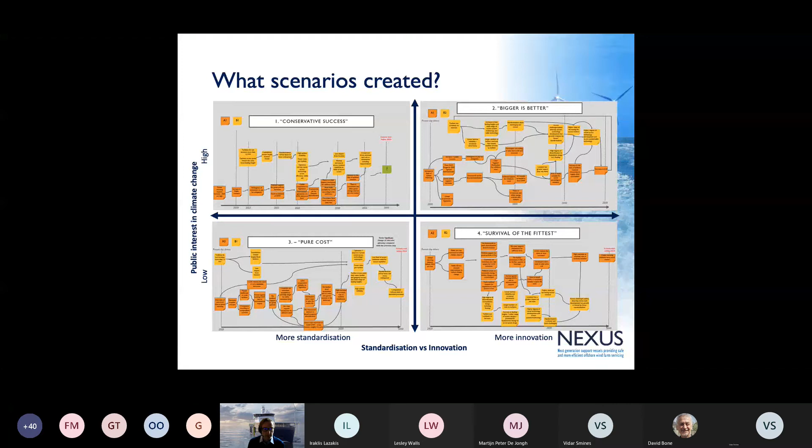In the other, survival of the fittest, perhaps the most pessimistic scenario, the market is tougher for one reason or another, perhaps to do with competing energy sources. This is a very uncertain scenario where it might be necessary to innovate in order to survive. Maintenance requirements might be quite similar to the cost-focused scenario, but with a different profile. So those are our four scenarios.

Matthew, could I have the next slide please? So the next challenge is, how do we take these scenarios and translate them for use with the i-SPOC model, so that we can learn and explore these issues around robustness to different futures?

The challenge is that scenario outputs are qualitative - they're narratives, they're influence diagrams - while i-SPOC requires quantitative input values. So somehow we have to move from one to the other. Given the general lack of publicly available data on a lot of the variables we're interested in, we decided to use expert judgment.

We identified a small group of subject matter experts, and we know the inputs that i-SPOC requires. We started with a group session where we worked on identifying the i-SPOC inputs that are likely to differ across our scenarios and likely to affect the KPIs that we can model.

We also agreed, as best we could, how those key inputs might differ across our scenarios. At this stage it was primarily directional - do we think this will go up or down, larger or smaller - although we did do some estimation.

After the group session, we had individual follow-up sessions where the experts estimated the percentage change from our baseline input values. We facilitated as best we could to get the experts thinking about the dependencies between variables. At the end of this process, we had four snapshots of input values that we think are appropriate for each scenario. Now I'll hand back to Matthew, who will talk more about what we did next.

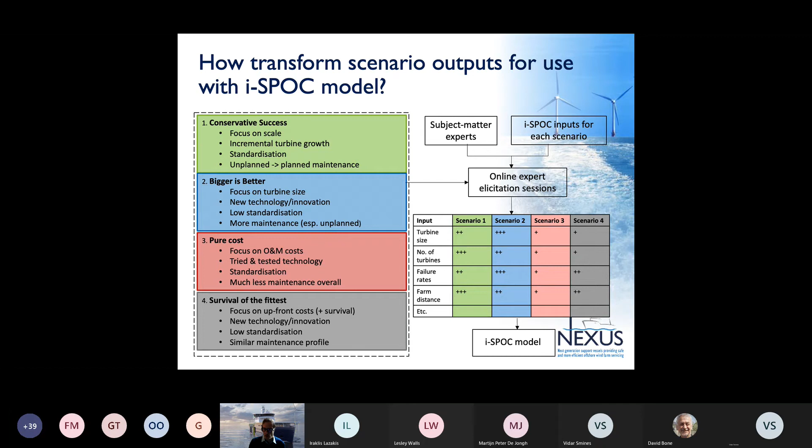Perfect, thank you so much Ian. So what I'm going to do is walk through how we utilised some of that output to do modelling that we hope can be useful for different stakeholders, but in particular for the vessel owner to make the business case. So first we'll start with the business case model for the vessel owner.

This was informed by collaboration with GMSL. There are four key aspects of the business case that they felt there were: the income and revenue generated over a 10-year period with the vessel, the OPEX over that same 10-year period, and the CAPEX, which is all the costs incurred in year 0.

And then there's this concept of the residual value - the estimated value of the vessel at the end of 10 years. Ten years was chosen because that is the typical charter and contracting length for one of these sorts of vessels. What we estimated was the residual value as a percentage of the CAPEX costs.

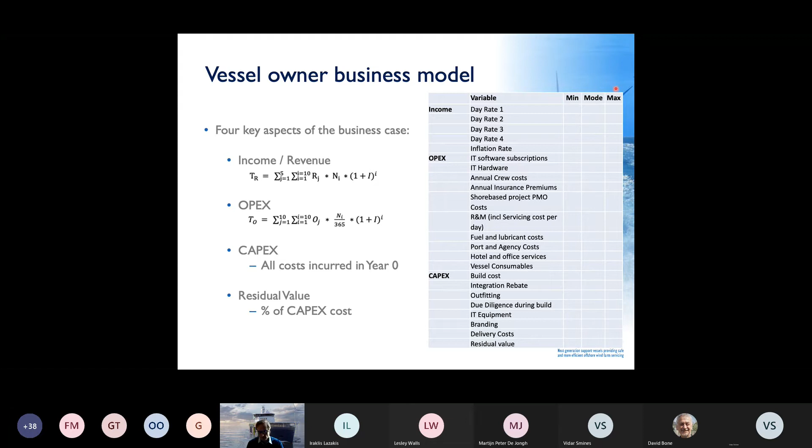We then developed a Monte Carlo simulation that could allow us to identify different KPIs that the vessel owner was interested in, to assess the potential range of values for a particular KPI. We're going to focus, for this session, on the internal rate of return. We could have looked at a variety of different KPIs, but this is the one we've decided to focus on, using some indicative values. It's not indicative of the concept, but of the approach we can take.

So this is just illustrative. We can create a baseline case showing the uncertainty for the internal rate of return for a particular vessel, showing that the range of potential values really moves from 0% all the way up to about 23%, with a peak around 12 or 13%.

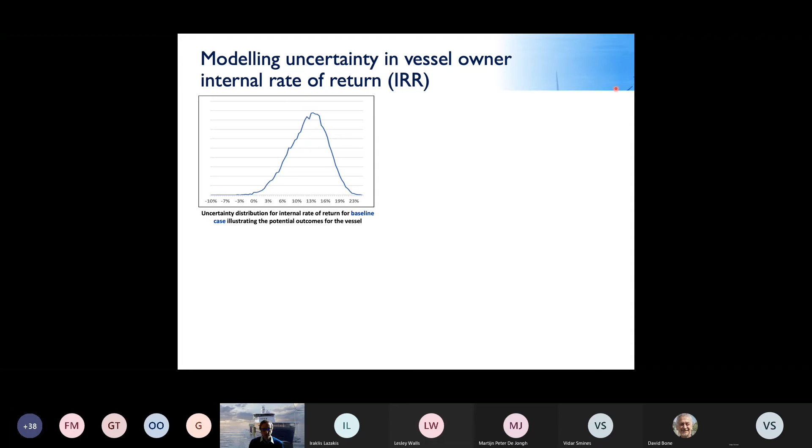That is useful on its own, but then we might want to compare it to a different vessel. Here we're comparing it to an alternative vessel where the most likely value for the day rate is likely to be higher, but there's more spread on that. We can see a slightly higher upside benefit on the alternative vessel, but also on the left-hand side that we're absorbing a lot of risk.

Moving through this quite quickly, we can also do this for other variables, such as inflation. Here we can see what happens when we have a case of high inflation or low inflation compared to the baseline case.

I'll move on to the last one, because it illustrates how we were using the scenarios to think about how the residual value of the vessel might change. In a scenario where everything is driven by cost, that particular vessel might not have a very high residual value, here represented by green.

In another case, the SOV could be very much in demand for a number of different reasons, and in the purple line you can see the upper end value the vessel could get under that scenario, with the blue being the baseline case. So that's indicative of some of the analysis we can do with the model we developed for the vessel owner.

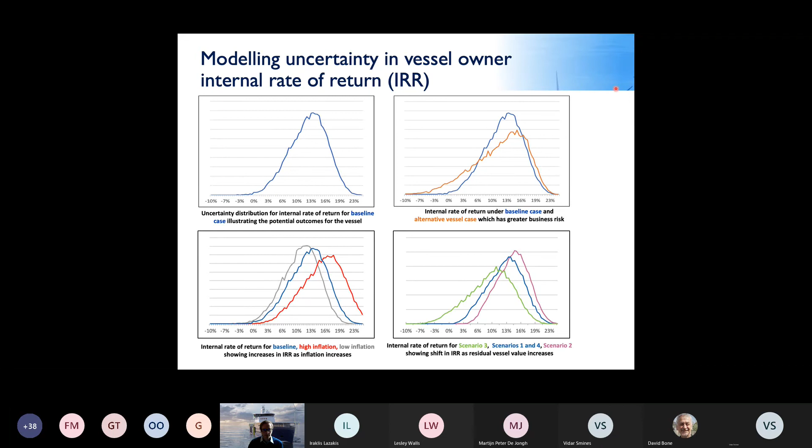Next, let's very quickly move through how we can use i-SPOC within the scenarios. There's quite a lot on the screen, so I'll talk through it. At the top we have the total cost KPI, and then the sub costs to that: the TOTEX, the unrequired technician costs, and the lost generation. Note that the TOTEX costs combine the CAPEX, the OPEX, and the scenario-specific VOYEX costs.

For each KPI, we're considering four different logistical concepts indicated by different colours, and the four different columns are the four different scenarios, all measured on the same scale, so we can see across which scenarios most divergence occurs. There's quite a lot that we can go through here.

I'll go through it quickly because there's another slide I also want to share. Here we can see that the best performing logistical concept varies between the large, which is purple, and the medium, which is blue, for scenarios 1, 2, and 4, with no difference from this CTV on scenario 3 — you can see they all come together.

The large monohull produces a consistent relative cost throughout, indicating that the costs are consistently balanced by the vessel activity, while the relative costs of the small monohull SOV and the CTV vary quite significantly between the scenarios, indicating that the effectiveness of these concepts depends far more on the scenarios and the operating environment compared to the large monohull, which is a little more robust.

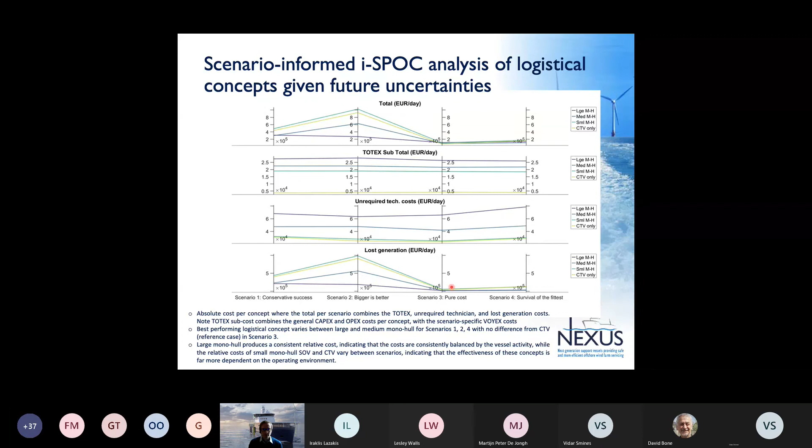Finally, in terms of the output we've looked at, here we're looking at more conventional sensitivity analysis, where we're looking at the effect on productivity depending on the number of turbines on a farm and the size of the vessel, i.e. the number of technicians we've got in it.

We're comparing two scenarios here, conservative success and survival of the fittest, just for illustrative means. Deep red means the farm is more productive, and blue means it's less productive. Here we can see that for the large monohull, it's fairly robust against changes in the number of turbines and technicians. CTV only is slightly changing as you increase the number of turbines, and similarly, as you go from medium to small, the robustness decreases.

Over in scenario 4, between the two scenarios where there's a shift in the degree of innovation and hence increased uncertainty on the reliability of the turbines, you can see that productivity, even with the large monohull, starts to drop slightly as we increase the number of turbines. But that effect is much more pronounced as you go smaller and smaller. So this allows us to assess the robustness of different vessels, and this analysis allows us to think about capacity matching between the logistical concept and technician capacity when tailoring it to wind farms of varying size.